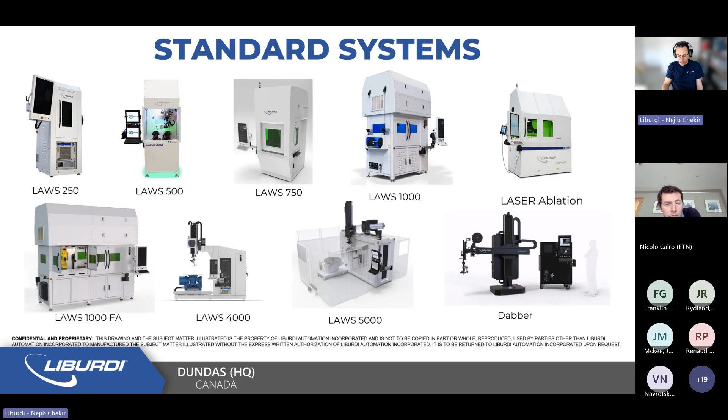Like most of these systems, they were application driven, and a lot of them you can use either wire as a feedstock or powder as well, depending on the process. With laser, typically you can use both. With arc processes, it's mostly wire that's used. Like any alloy that can be either formed into wire or powder form, technically that means you can use this technology and feed that alloy of interest into the melt pool to generate the repair or the manufacturing, sometimes, of new components.

To describe a little bit more schematically the process itself, so you have a basic understanding of what directed energy deposition solutions are: typically you have, like in this case, I'm showing a laser head, but it could be also very easily an arc process, and some sort of feeding solution. In this case, I'm showing a wire feeder, but you can imagine it could also be a powder feeder, bringing the material of interest, so the wire or the powder, to the area of interest. The area of interest is where we'll focus the energy of the laser beam or the electrical arc in order to generate a melt pool.

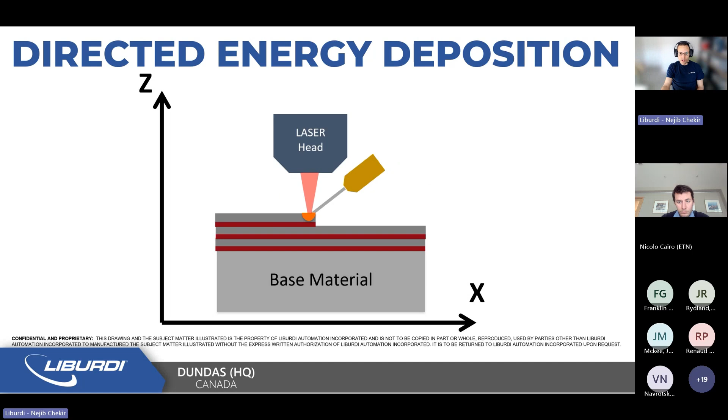Then by the combination of feeding the material and moving the head in space, in this case I'm showing it in the ZX plane, but it can be in 3D obviously, and by repeating the process, depositing multiple beads, you can then generate a deposit in the area of interest that can be used for the repair or, as I said, sometimes in the manufacturing of new components.

There are some key words here. The build-up direction is usually associated with the Z-axis when the weld head goes up in increments and then deposits a new bead. Some heat affected zones, which I'm showing schematically in red here - when you're welding, it's a thermal effect, so you generate some isothermals that can affect one or multiple beads that were previously deposited, including the base material as well. So these would be the heat affected zones. They can affect your microstructure, which in turn can affect the mechanical properties associated with the deposited material.

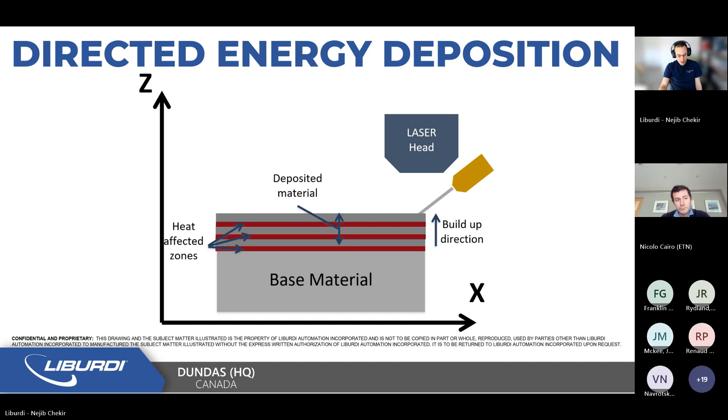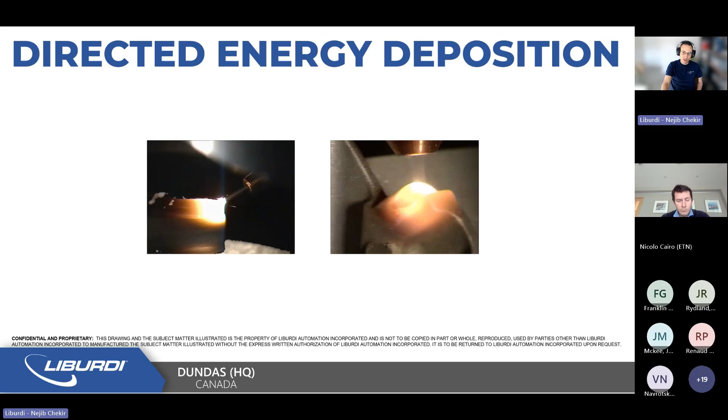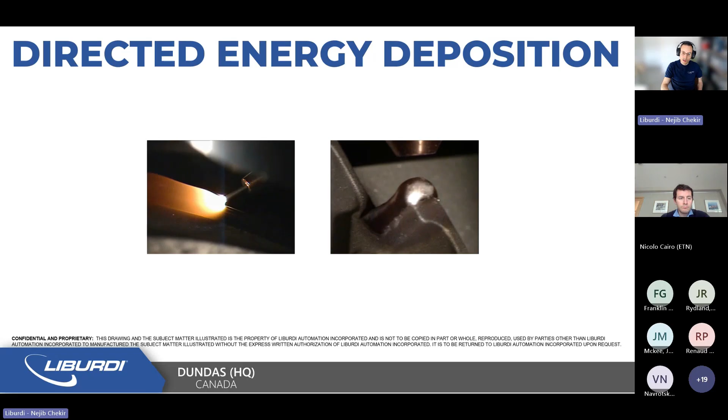So in this case, when we look at some videos of the process, I'm showing two examples here. One is laser wire deposition on the left side - it's not very clear, but it's the repair of a blade tip, a high pressure compressor blade tip. On the right side, you see the laser and powder process, in this case for the repair area of a Z-notch low pressure turbine blade. The right one can typically be used either in repair applications or also in manufacturing of new laser power, low pressure turbine components.

In order to enable these repair processes, one very important point is really to teach the robot how to go in space. We have two options in this case. One option would be if it's a very simple part geometry, let's say a part that is only in 2D dimension, I would call it. The blade tip repair is one example, or these caps that you can put on the bottom of some low pressure turbine blades in order to cap the root.

In this case, we could use just a visual solution, so a top camera that can generate a black and white type of image of the area of interest. By using the contrasts generated in this image, you can generate sites of interest. Here they're very small, but those would be sites of interest calibrated with regards to the position of your torch tip. Then by transferring those site positions to the robot, you can generate the tool path of interest and carry out the repair or manufacturing of a new component using this technology.

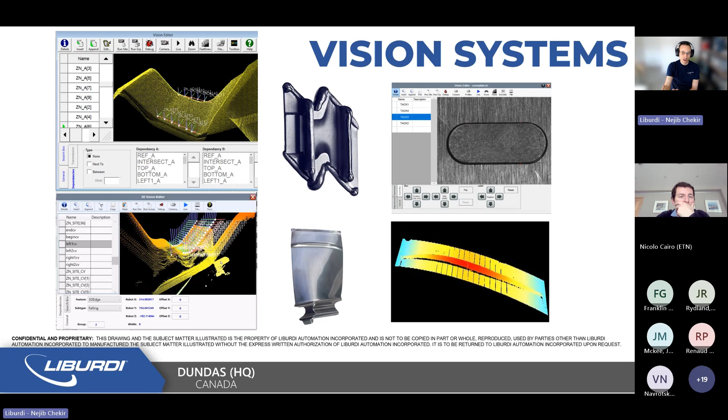That can include something like rotary and tilt that teaches the weld head where to go. By generating all these sites, the robot will know where to go in space and precisely position the heads to complete the repair of the part of interest. So two examples here, and there are a few other methods, also more manual ones, but this is what enables us to teach the robots where to go in space.

Following the weld, once you do the weld, there are a few very important processes that can happen after. In this case, it can include post-processing in the form of heat treatments, for instance, or machining, could be two of the options post-welding. Machining mostly to get back to the nominal geometry of the part. And the heat treatment typically is for stress relieving, very rarely, in the case of repairs, to change the generated microstructure.

Other processes can be used as well to qualify the parts, usually based on either requirements from the OEM or, when developing new repairs, something we work on together with either the OEM or the supplier of the repair in order to define what our requirements are for a successful repair.

Solutions like NDT, including things like CMM or CT scanning, X-ray, so a few different methods can be used to understand how sound the deposit was. But also from time to time, destructive testing can be very useful, not only to better understand the typical microstructure developed with the repair and validate that microstructure, but also to ensure that no detrimental internal defects were produced within the deposits, such as porosity or liquefaction.

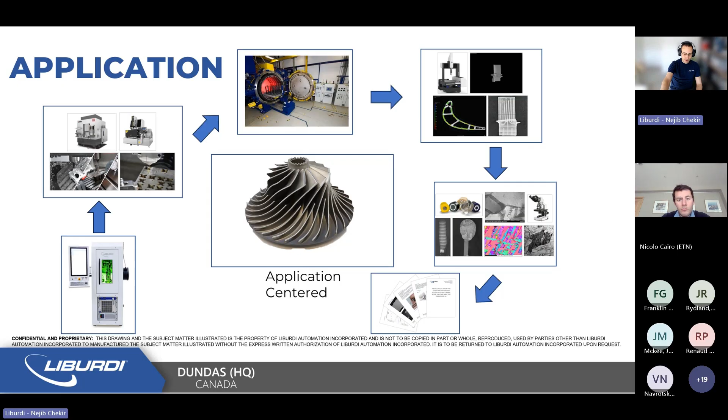These can be stored in a log file as well, so you can either use it in real time or post-weld in order to understand some of the key parameters associated to the weld. That can include thermal feedback, but also things like typical laser power or arc power used, feed rates, and positional information associated to the gantry or any other axis integrated in the machine. So they're extremely valuable for data logging and traceability of the different welds that would be completed.

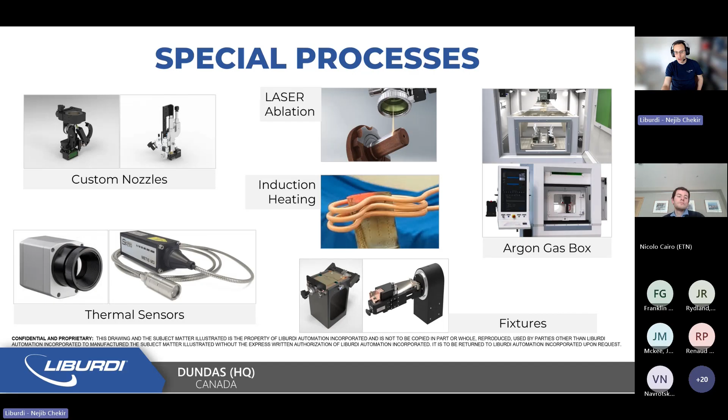As an example, one very common case is blade tip repair of high pressure compressor blades. Here you can see an LAWS 500, though we've also sold LAWS 1000 platforms to achieve these types of repairs. What you see here is the plasma arc welding process on the left side, with two repair stations, so when one is welding you can load the other one as needed.

Wire feeding solution, top cameras to be able to generate the sites of interest. This solution was pretty much integrated in the first machine we sold for this type of application back in the early 90s.

Since then, this platform has really become one of the typical platforms currently used in directed energy deposition repair of blade tips or leading edges. Millions of components have been processed since then. These machines run 24 hours a day, typically 3 shifts a day, highly automated and highly repeatable repairs.

Most of the time we use either nickel-based or titanium-based alloys for these repairs. Over the years, the solution has become very customizable, so you can adapt it for different blade designs, and up to the latest gas turbine designs are being processed currently on this platform.

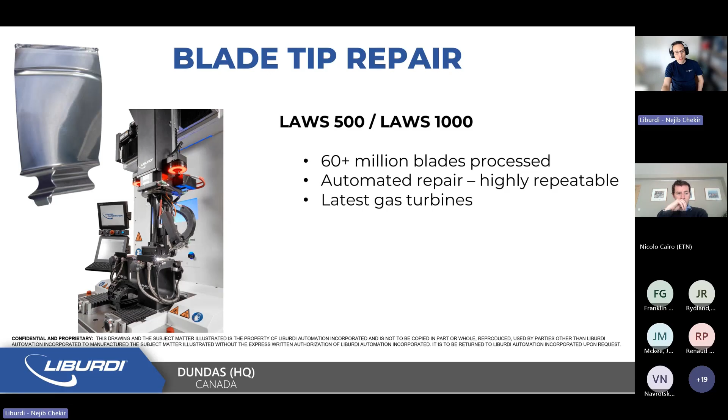That's one example of an application regrouping all this automation, but you can even increase the level of complexity of the automation by integrating other sensors and improve the traceability of your process.

In this case, you can integrate things like optical character recognition for automatically saving any serial number associated to any part into the weld schedule of the specific part. You can use RFID tracking as well in order to follow up on the states of the machine and of the components being repaired.

And then through technologies like OPC UA, for instance, this is a software solution that can connect the machine to your own internal network. That allows you to retrieve any key parameters from the machine directly to your network, and that enables you, in a way, big data.

So you're able to use any data that's generated by the machine, including, for instance, thermal feedback, the weld monitoring, any videos of the weld itself, the serial numbers. All of that can be combined, and then you can present them into a chart form.

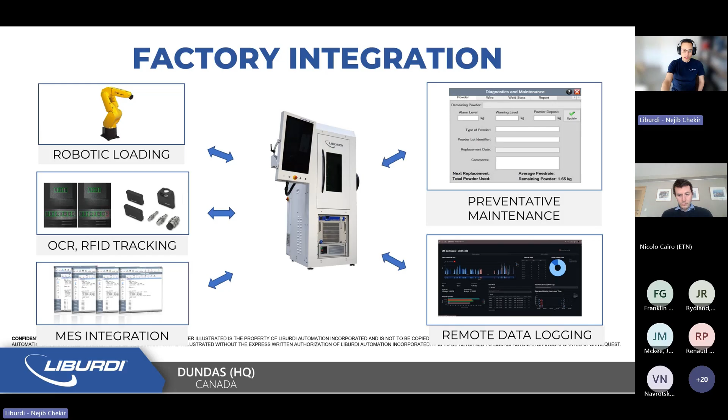When you combine all these different solutions, you can end up with a highly automated platform that can have, in this case, well above 5-axis degrees of freedom, where you can combine all of this together, and all the operator has to do is load the unwelded parts.

The machine can recognize which parts were welded or unwelded, and do all the process where it will load the part into the fixture of interest, rotate it to the welding platform area, generate the sites of interest, and use the welding program to generate the weld.

And then bring back the welded blade to the arm location, and the arm will retrieve the blade and put it back in its nest.

All the operator has to do is load or unload the blades, and everything is fully automated, with a focus on traceability and the history of whatever repair has been completed. In this case, it would be for low pressure turbine Z-notch repair.

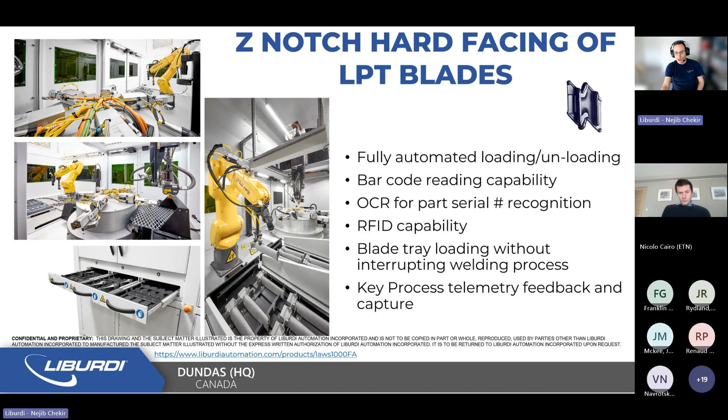In the years 90s, 1990s, 2000s, a lot of the repair was mostly outsourced from the OEMs, and the focus was mostly on trying to standardize repair applications.

But then by the 2010s, a lot of the computer power available opened a new field of automation that enabled digital data and the use of these automated solutions more reliably.

The OEMs mostly tried to expand their repair capabilities more and more during that time, and the complexity in the engine designs increased substantially, which pushed more so the demand for automation and ensuring that you can trust the repair that you're achieving, and minimize any scrapping of the components.

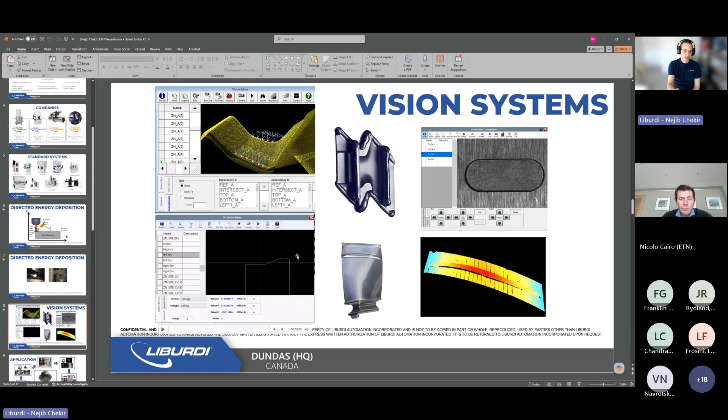So when you move 1 inch, it's actually 1 inch to the micron - sorry, I'm used to imperial here, but if you say 20 millimeters, you'll be at 20 millimeters to the micron precision. That, combined with the vision technologies I described earlier, generates very precise sites based on a calibration procedure we developed to relate the data from this vision technology to the gantry position.

So you can achieve highly precise positions using this technology - that's to understand where to shoot your laser and feed the powder or wire. The other thing is how to ensure you meet the specs, if I understood the rest of the question, and that is through welding development.

Most of the time our customers will ask us to develop the weld meeting the specs, in terms of microstructure, mechanical properties, or dimensional accuracy. We develop the weld by finding the proper welding parameters that can generate a sound buildup. That process can take anywhere from 2 to 4 weeks typically.

Once you have these welding parameters, they're kind of locked, and you qualify the process with a batch of representative parts. Sometimes a customer will tell us to weld 100 parts and ensure 95 of them are good, for instance, to give you an image. Those 95 will go through destructive testing to ensure everything looks good in these parts.

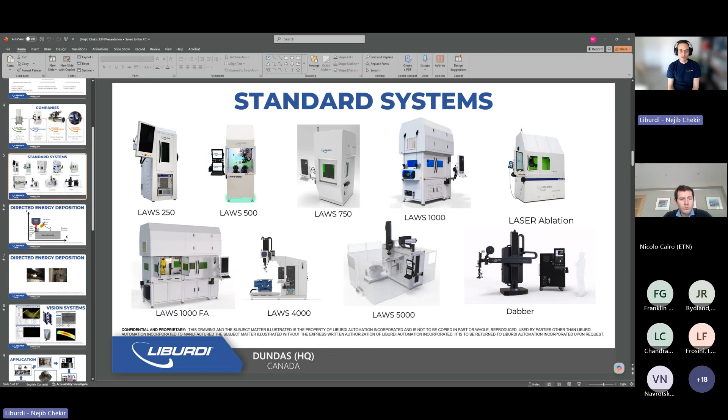That's one way to ensure the weld looks good on the part itself, and then you can add more advanced characterization techniques to understand anything from dilution to the different phases that can develop in that deposited weld, and you can also use CMMs or X-rays to validate that as well.

Once the weld development is complete, typically what happens is like a weld schedule - the parameters are locked, and the combination of calibration and verifications on the machine, which can happen anywhere from weekly to monthly to every 6 months, will ensure that your machine produces a repeatable weld in the area of interest.

The combination of the vision system, the precision of the gantry, and the search boxes that tell you where the sites of interest are on each part, can handle the variation part to part as well, which can be seen in the case of repaired components.

It's very different from new castings or new manufacturing, where you can see variations, sometimes acceptable variations up to, let's call them 20 thou. That would be almost like half a millimeter in some cases.